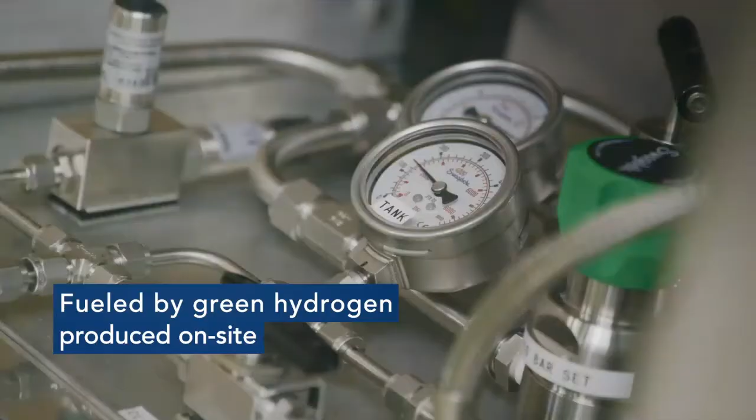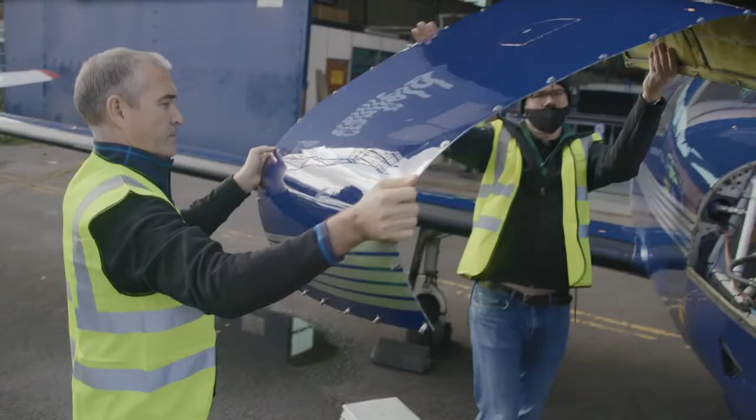ZeroAvia is revolutionizing aviation by building a new generation of zero-emission powertrains for aircraft of all sizes. So we're hoping to become one of the major engine manufacturers for the new sustainable aviation.

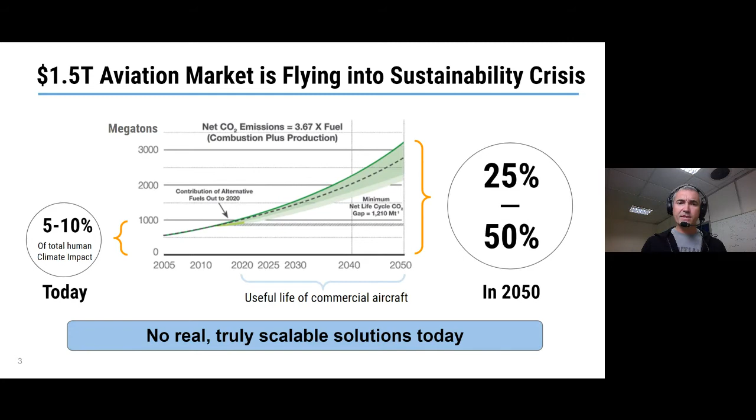So that was the motivation behind starting the company about 3 years ago. And we said very early on, we want to really focus on commercial aviation, not just what was in vogue back then, urban air mobility, vertical flights, which are all very exciting from a technical perspective, but they're not the ones that would bring emission benefits today.

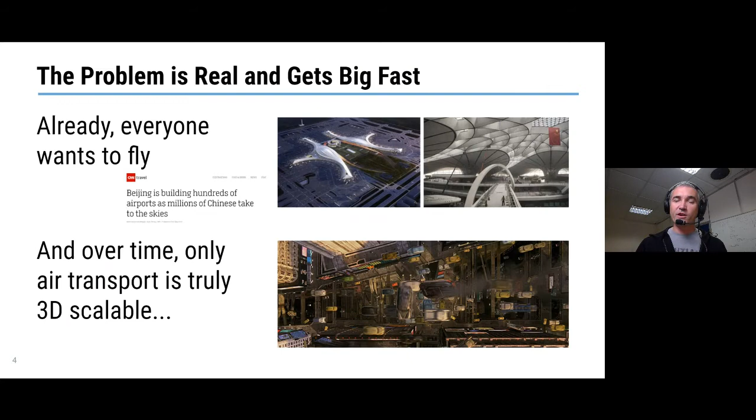Over time, however, air transport is expected to go into wider and wider segments, and essentially the fundamental reason is that only air transport is truly 3D scalable. On the bottom right here, those who recognize the picture from The Fifth Element, the movie, get bonus points. But we're going to see some version of this sometime soon, and we need to make sure that when that happens, all of those flying vehicles are propelled by zero-emission fuels.

So how do we make sense across all of this? This is something we had to actually do early on at ZeroAvia. We looked at fundamentally what are the first principles behind each of these propulsion methods, each of these fuels, how we think they will play out competitively with each other, and competitive with jet fuel, with fossil fuel, over the next 10, 20, 30 years, and what we think is going to win in the end, or take a significant portion of the market.

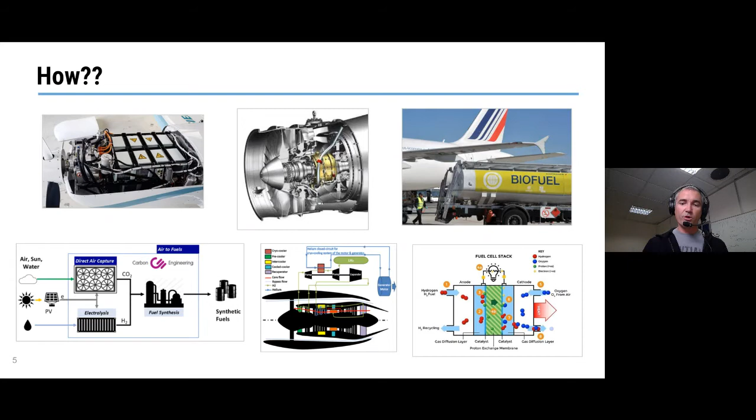So let's look at these one by one. On batteries, as Peter mentioned, my previous company was in the electric vehicle space, battery EVs on the ground, and we've done a pretty good job working with a number of automakers and charging infrastructure companies to integrate 100,000 plus vehicles under our platform. All these batteries on wheels help integrate more renewables into the grid, provide grid services, grid resilience. When the power goes down, you might possibly get power from your electric cars in your neighborhood. So we know, as a team, very well the battery advantages and disadvantages, and I have several key people on my team today at ZeroAvia coming from my previous company.

So some of the disadvantages mentioned here are relevant for aviation. Batteries are dramatically heavier than jet fuel per unit of energy. Here, 250 watt-hours per kilo is something the best production battery of today can deliver, and this is a Tesla Model 3 battery pack, at the cell level.

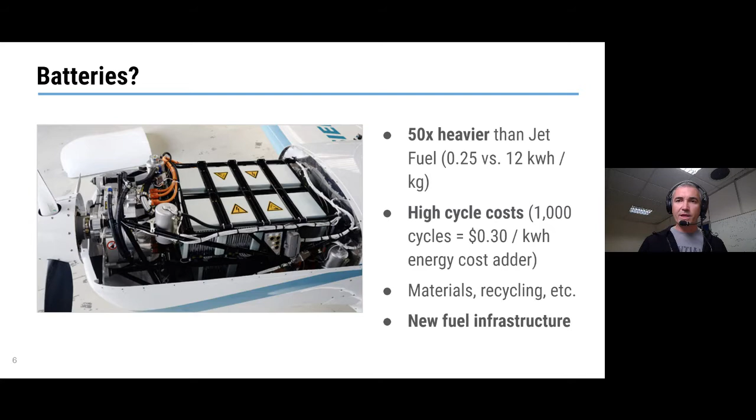The next one actually helps that a little bit, where we say, okay, batteries are too heavy, so why don't we combine the turbine that uses fossil fuel with a little bit of battery just to help it out a little, maybe on takeoff, so we can downsize the turbine, maybe for cruise, and get some more efficiency out of this, and maybe lower emissions on the takeoff stage of flight and initial climb out. Possible, scalable. The problem is, of course, higher weight and complexity by construction—you're adding new systems, a battery, motor generator, power electronics, wiring, all of those things, adding complexity, which makes it harder to certify since it's a more complex system.

But by the time you take all of that into account, all that extra weight, you'll actually see there are relatively minor improvements in efficiency. There are various studies out there—a NASA study says that by the time you take into account all those effects, you're going to see maybe single-digit percent improvements in efficiency, which is okay, but definitely not going to solve the big problem we have in aviation. We really need to drastically reduce emissions, so the hybrid's probably not going to do it.

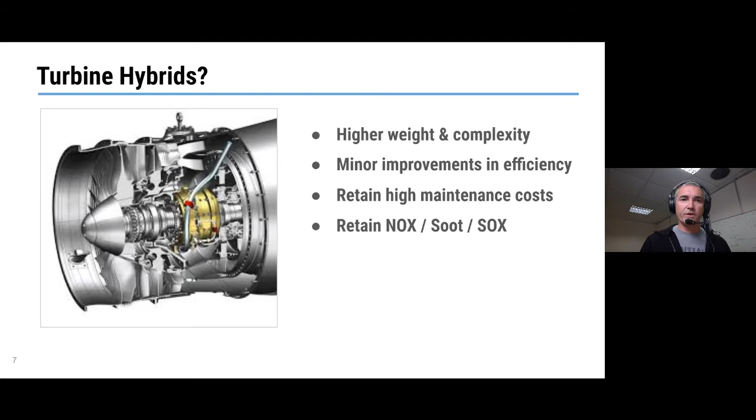So the next one is biofuels, and that's where most of the sustainable aviation fuels are right now.

It's zero emission, zero CO2 emissions, and actually better particulate emissions as well, often. Obviously much lower sulfur content, so you don't have that much of the additional emissions.

But the core problem there is scalability. Here's a comparison I like to make: for biofuels, if you take two equivalent land plots in, let's say, Southern Europe or Southwestern United States, where there's a lot of solar resource, and plant biofeedstock for biofuel on one acre of land, and next to it you put solar panels and an electrolysis machine that produces hydrogen out of water and electricity, you will have 500 times higher yield in terms of the chemical energy in your fuel from the solar electrolysis on one acre of land than you would get from the biofuels feedstock.

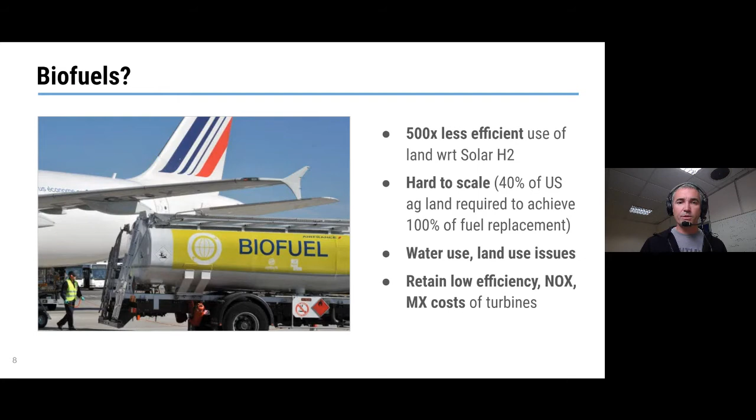So that makes it clear that once you try to scale it, let's say you want eventually 100% of aviation, and aviation is growing, once you try to scale it to that type of scale, you will run out of water, you will run out of land, and it will just not be economical at that point. On top of that, you still have relatively low efficiency of thermal engines, especially on the bottom end of the spectrum for smaller vehicles, still some artifacts of high temperature combustion like nitrogen oxide and so forth, and a higher maintenance cost generally than electrified powertrains.

So synthetic fuels, the next one. Synthetic fuels are actually scalable. You can have a hydrogen feedstock from renewable electricity, so that you can produce at scale, as mentioned in the previous slide. And then you can combine it with CO2 from, let's say, direct air capture or concentrated industrial sources, and produce liquid jet fuel, synthetic jet fuel.

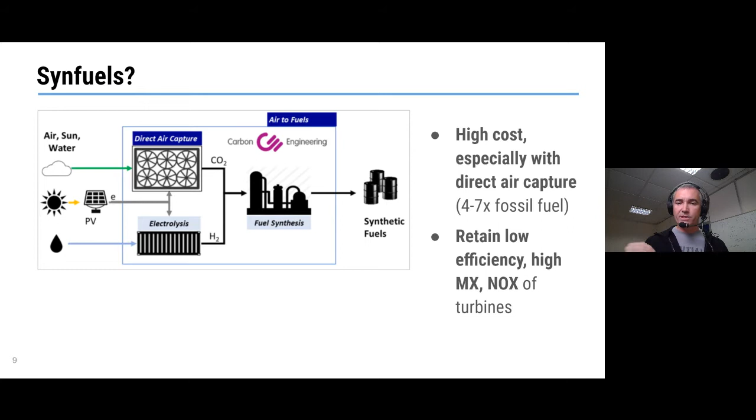That actually can scale. The problems are that it's quite a bit higher cost of production, because compared to hydrogen, for example, you have to start from hydrogen feedstock. So you're already invested into infrastructure for hydrogen. You produced hydrogen, and then you have to get CO2 from direct air capture, which is a pretty expensive and resource intensive process. And then you have to have another chemical plant downstream to combine the two and produce the synthetic fuel. And then in the engines, you're still retaining relatively lower efficiency, high maintenance costs, and all of the artifacts of high temperature combustion. So synthetic fuels: scalable, but costly, and still have some disadvantages of internal combustion engines.

And then we're moving to the two hydrogen-based sources. So hydrogen turbines, an interesting approach that produces sort of true zero emission outputs. So it's not a net zero emission, but true zero emission out of the engine. Perhaps some nitrogen oxide still there because you do have high temperature combustion. In fact, if you don't manage the fuel-oxygen mixture correctly, you're going to have even more NOx than a kerosene turbine or jet fuel turbine.

But you can manage the ratio of hydrogen to oxygen to reduce the flame temperature, which also reduces the efficiency, of course, and reduce the NOx production. You still have relatively lower efficiency in the thermal engine than some of the electric powertrains, but at least you're avoiding the soot particles, you're avoiding the CO2 emissions, and some other effects.

Now, it does require new fuel infrastructure. Similarly to battery electric, new fuel, you need to produce it, you need to deliver it, you need to figure it out. And one other disadvantage of hydrogen in general, but in this specific case of burning hydrogen even more so, is the high volume of fuel.

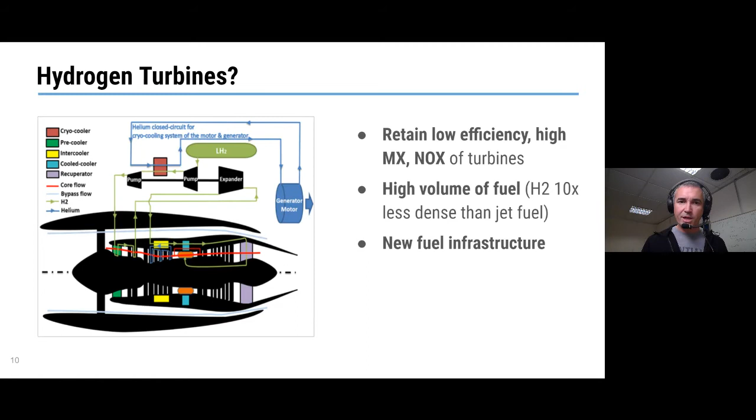And that's where we come to what we think is the best option, which is the hydrogen fuel cell based approach, hydrogen electric. So you do have higher volume of fuel, but you are using it more efficiently.

The fuel cells today, even the ones that we use, which right now we're running, as Peter mentioned and you saw in the video, the 6-seat 2-ton vehicle, it's a 250 kilowatt system, which we're scaling now to a 600 kilowatt turbine replacement engine.

Even those smaller fuel cell systems are over 50% efficient, which compared to a small turbine is easily 2x more efficient. So remember from the previous slide, you get a 3x disadvantage on the volume. Now you get 2x of that back for a small turbine or small aircraft. So you're only about 1.5x more volume requirement, which gets to a manageable point.

And remember, on the mass, you're always better. Now you're becoming competitive on the volume, which is important. So you can see how you can deliver similar ranges from the hydrogen electric aircraft compared to the fossil fuel aircraft. The disadvantages are lower power density.

Today, the turbines are great. Even the small turbines like the PT6 turbine achieve much higher power per kilogram. The best fuel cell systems of today are maybe at best 1 kilowatt per kilogram. That's the one we are roughly flying today, including the fuel cell stack itself, balance of plant, all the compressors and everything all together need to come together to make this happen, which is better than piston engines.

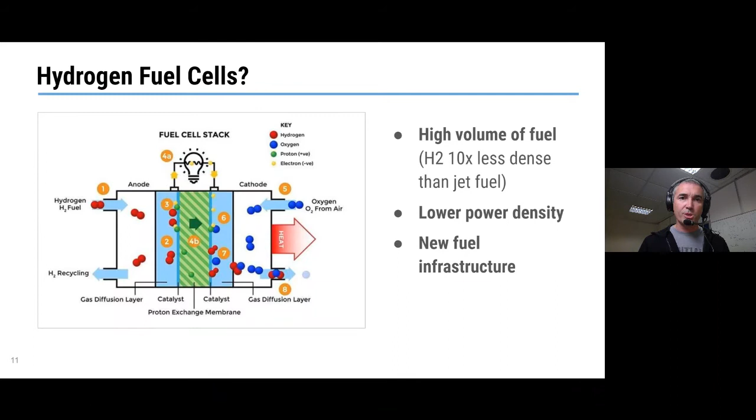So out of all of this, we decided that the best approach really is renewably powered hydrogen electric aviation. And that's what we set out to do 3 years ago. We think that it can deliver not only zero emissions, but also lower costs and long range that can be competitive with fossil fuel aircraft.

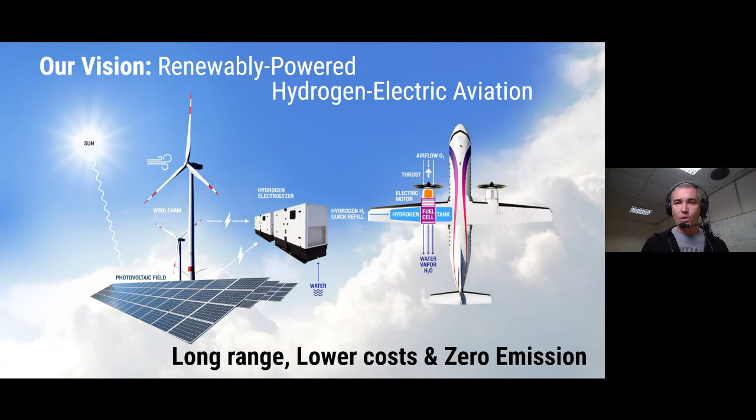We believe that the best approach to infrastructure is renewably produced hydrogen from near-site renewable electricity, ideally on-site production through electrolysis at the airport, whether landside or airside, so we avoid transportation of that fuel. Remember, higher volume drives costs of the fuel quite high, and we want to avoid that. So that's the approach there.

It was good to see, especially over the last 6 to 9 months, a huge acceleration of hydrogen in aviation. In May, there was a study released by the Clean Sky Initiative and the European Union that basically said the future of aviation is going to be hydrogen.

And then we saw the French government and Airbus making escalating levels of commitment starting early this year, and then in the summer, ZeroAvia held our own aviation sustainability summit, and we had Airbus and Rolls-Royce and others present there, and Airbus started talking about hydrogen as one of the primary vectors for them for cleaning up aviation.

And then I was on a panel with Guillaume Faury just a couple of months ago when he was very strongly committing to hydrogen for Airbus as a solution. And then, of course, about 7 weeks ago, we heard Airbus announce 3 new airframes that they're targeting for 2035 entry into service, designed specifically for hydrogen. So it was great to see such great validation for the hydrogen strategy in just the last 9 months.

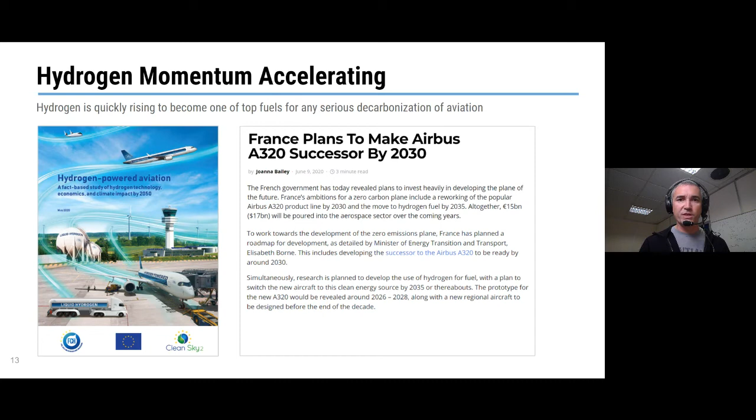But we think it's going to be even better than that. We think that not only is hydrogen electric better than anything else in the zero emission space, it will be better than jet turbines eventually.

It's a similar sentiment to what we've seen in ground mobility. The EVs are better cars than gasoline cars, so not just the best zero emission cars, but better cars. And that's what Tesla realized early on, and they built a better car.

Those cars are selling because they're better cars, they have better user experience. So similarly here, we think that there are some advantages that the hydrogen electric approach actually has over jet turbines.

Some of them are here, not going to read through the whole thing, but the fuel cost is much more stable because fundamentally electricity is a much more stable commodity. And if you hook up your fuel production facility to renewable electricity, it is usually sold on long-term contracts.

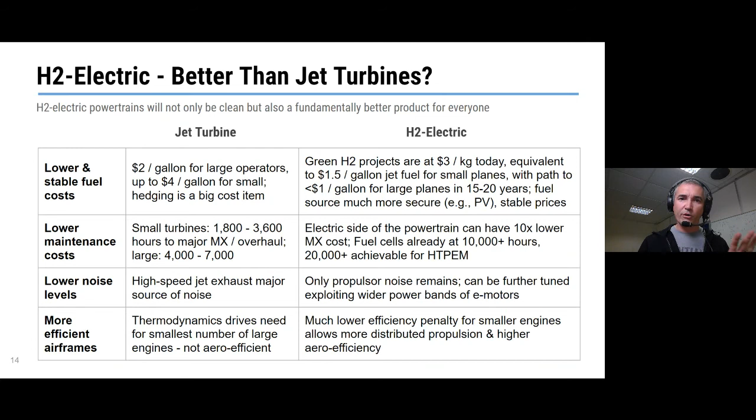You're going to see more efficient airframes enabled by this electrified propulsion because it's easier to distribute now the source of thrust, now that you have electric motors. So we think that overall is going to be a better product over time.

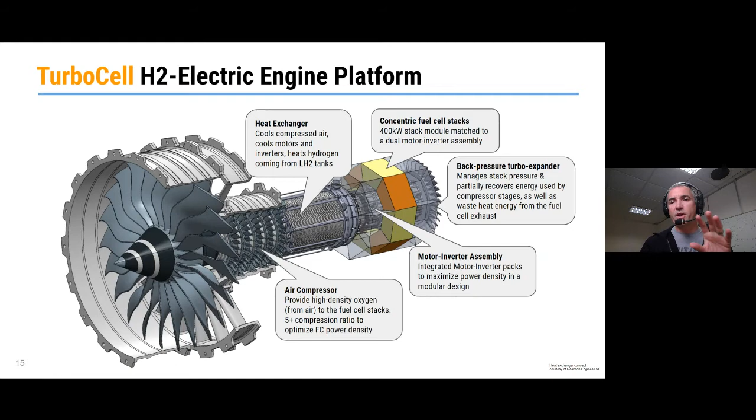And we think that level of integration is going to really bring out the much higher power densities that will become competitive with the jet engines, with the turbine engines.

Obviously, storing fuel is very important, and we're working with some partners on that that show pretty amazing mass fractions for the fuel storage. So this particular one, this is not a Photoshop. This is actually how much it weighs, the tank that is shown on the picture here. You get 70% mass fraction, which means that 70% of the total mass of your storage is fuel, right? And for hydrogen, this is very, very high.

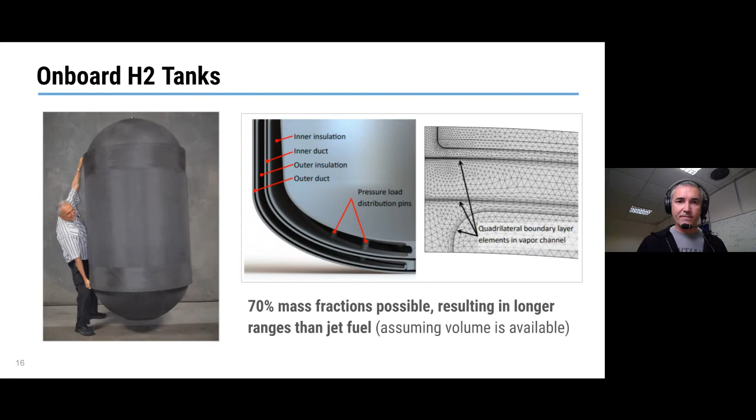And if you remember, by unit of mass, hydrogen is 3 times better than jet fuel. So now if you have 70% mass fraction, that means that by mass of the entire fuel system, you're 2x better than jet fuel. So you can trade it for range, or you can say, well, I need the same range, but I'm going to now have half of the weight of the fuel that I would otherwise need, which opens up interesting possibilities, of course.

And then we talked about the infrastructure, and our approach as a company is not only to provide the power plants on the power by the hour sort of hourly lease model, but also include in that power by the hour, include into that business model the fuel cost. So we will also look to control the fuel supply and deploy these fuel generation facilities on the airports.

We actually have one at Cranfield already built up, small scale, but it creates hydrogen for our operations and powers our planes. But imagine, those of you who may be familiar with what Tesla did with their supercharger network, that basically is considered to be the main selling factor for Tesla cars, because that removes completely any range anxiety from the equation for all the drivers.

They know that they can get electricity in any place in the world by just driving through the supercharger and charging for 10, 20, 30 minutes. Same concept here. You need to enable ubiquitous fuel.

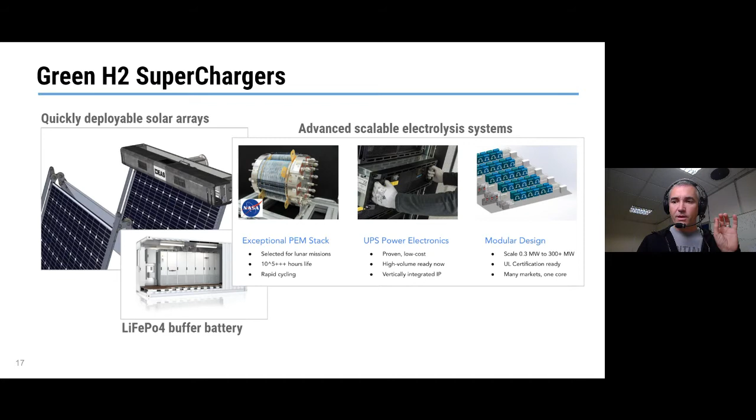So our plan, roadmap, starting with 10 to 20 seats, sort of PT6 size replacements, so 600 kilowatt or so, going after aircraft like this, Part 23 initially up to 19 passengers. We believe that within the next 3 years, we'll be able to deliver 500 miles of range in those types of airframes, which already covers a vast majority of use cases for those airframes.

You generally, as a passenger, don't want to be there for more than an hour in an aircraft like this. So that's the type of missions those aircraft fly, and there are about 10,000 of those aircraft worldwide. So it's already a quite sizable market. But that's obviously just the beginning.

Then we move to larger airframes, longer distances. We think that by 2030 we can actually fulfill the Prime Minister's vision here and the Jet Zero vision of a single-aisle 100-passenger jet being able to go for 1,000 kilometers. In his case, we think that target can actually be improved—we think we'll be able to do 2,000 miles by 2030 and put it in the air.

And then beyond that, you would need to see some new aircraft concepts. This is an older version of this slide that did not yet have the new concepts from Airbus, so it was great to see Airbus actually announcing the new concepts that they are going to build 2035 plus, and that's what would be fitting here.

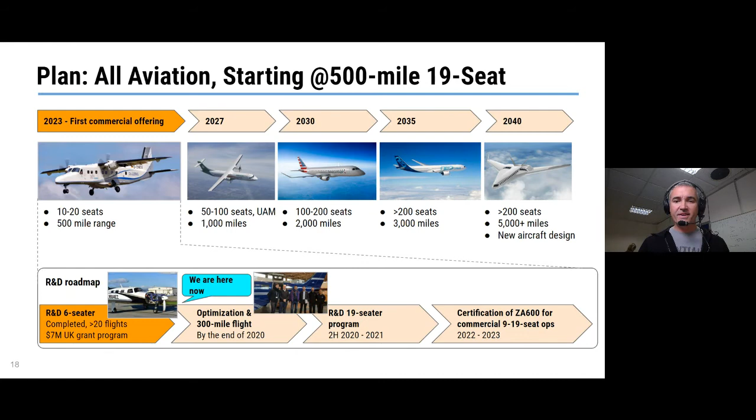Now we're starting to ramp up on the 19-seater program. We're going to see those aircraft flying next year. It's a very exciting time to be in this business of zero-emission aviation.

And my last slide here is us kicking off the Jet Zero Council with the Prime Minister and a few others earlier this year, when we were talking about how we're going to translate all that progress, all that vision, into an actual aircraft of meaningful size—commercially meaningful size—by 2030.

So it's great to be in the UK. We were originally started in California, but now most of the company is actually located in the UK, and we see great support from the industry and from the government here. We're very lucky to be here. So this is my last slide, and with this, I guess I'll take questions.

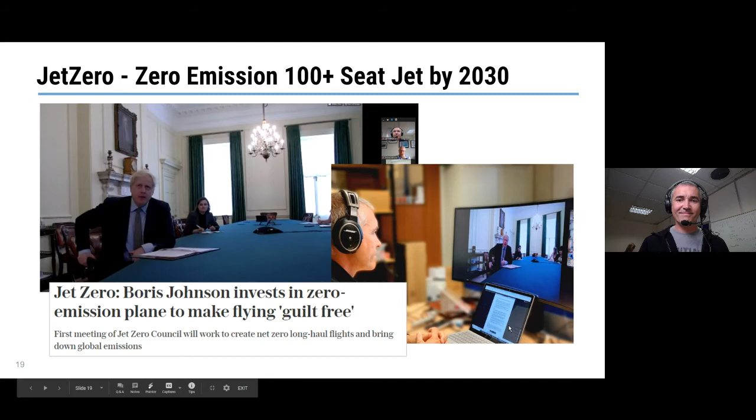Thanks very much, Val. That was a great deal of information for us all to take in. I guess one of the favourite bits I found was your description of the various alternative approaches, and why what you're proposing comes out at the top of the pyramid as your favourite solution. I'm going to go through the questions from the audience in slow time—I think we've probably got about 20 minutes, so let's see how many we can get in.

First question: we're all very aware of the airship accidents in the interwar years. It's a common conception that hydrogen is very dangerous and has been avoided in atmospheric flight since that time—what's your view? Yeah, of course, a frequently asked question, as you can imagine. In fact, so much so that at one time we actually had a slide with the Hindenburg disaster in our slide deck, just to lay that to bed early on. The short answer is, in the 80 years that have passed, technology has improved a little bit, and our ability to contain hydrogen and tame it has improved dramatically.